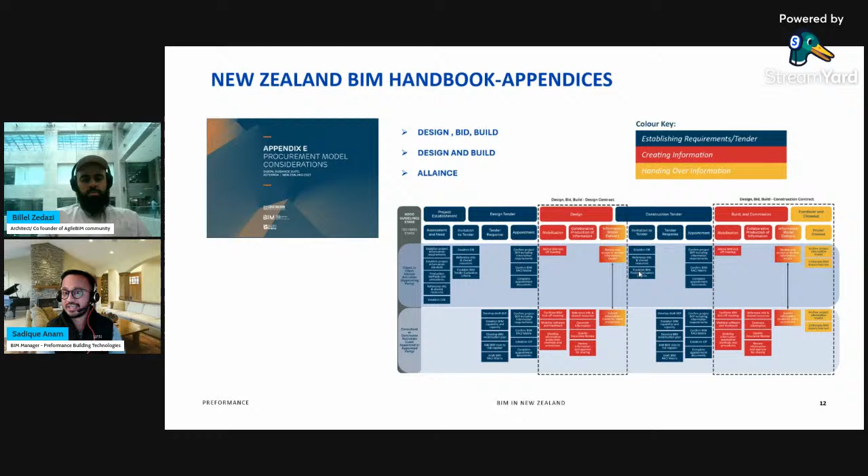Appendix D covers a lot of different things: asset management, record modeling, analysis, code validation. Appendix E talks about the procurement model. So Appendix E not just talks about the design phase, it talks about the BIM requirements from the contractor phase as well. So it's quite comprehensive, and I would really encourage everybody to read through it, and I'm pretty sure it would be quite beneficial.

Now, Appendix F talks about the RACI matrix. The RACI full form is responsible, accountable, consulted, and informed. So it outlines every single key accountable person and what they would be accountable for. Like in a design phase, the architect would be responsible for designing. The contractor, if it's engaged in the pre-construction phase, would be informed and consulted. So all different key players within the project would be assigned different responsibilities as per the RACI matrix. And this is quite comprehensive and quite useful as well. You'll see in a bit.

Appendix G talks about the level of development, but in more detail, and it talks about level of development for different kinds of elements within the building, outside the building, mechanical, electrical, civil, RCC, pre-stressed concrete, and everything. And Appendix H talks about BIM experience company-wide. It's a high-level understanding of how key people can be related within the project, BIM usage, client-specific requirements.

And Appendix G talks about, as you can see, we've highlighted on the right, what can be considered as a clash and what is not to be considered as a clash, what can be resolved on site as a contractor, and what needs to be resolved in the design phase by the consultants. So quite comprehensive, gives quite valuable insight on the whole coordination process, which I'll come to in a bit, but I would say really, really comprehensive.

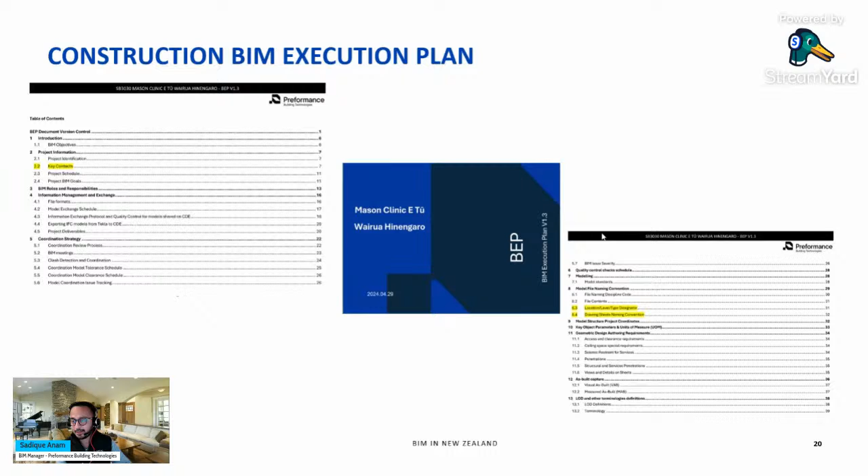So I've just taken a screenshot of some of the table of contents, like project information, BIM roles, quality checks, model structure. All of these things that are incorporated here are somehow related to the New Zealand BIM handbook, and that percolates to ISO 19650, BIM Forum LOD, or United Kingdom BIM standards. So quite comprehensive. And once we implement that, in a minute, I'll share the outcome of this BIM process, the result of implementing the New Zealand BIM handbook and all the standards available to us. So this is a construction BIM execution plan.

Some of the software that we use for common data environment are Procore for raising RFIs, sharing all the documents, sharing the models and drawings with our subcontractors, and the consultants sharing the models with us. Autodesk, as everyone knows, most of the modeling is done in Revit, so we're using Autodesk Revit, and we're using Autodesk Construction Cloud for our common data environment for model sharing and linking in Revit.

The other one being Dropbox. The Dropbox has all the contract documents, RFP documents, and everything on the contractual side of things. And also we share videos with our external clients, and we share, for example, snips of the progress of our document set using Dropbox. And SharePoint is where we host all our standards and BEPs and other documentation.

The next one is a very, very crucial tool for us in this project. It's called Revizto, and it's like an all-in-one platform that we use for our coordination and data validation, checking data, quantity estimates. For those who don't know what Revizto is, it's like a digital version of the huddle board that I think Ignacio talked about in the Norway BIM World Cup, but it's digital.

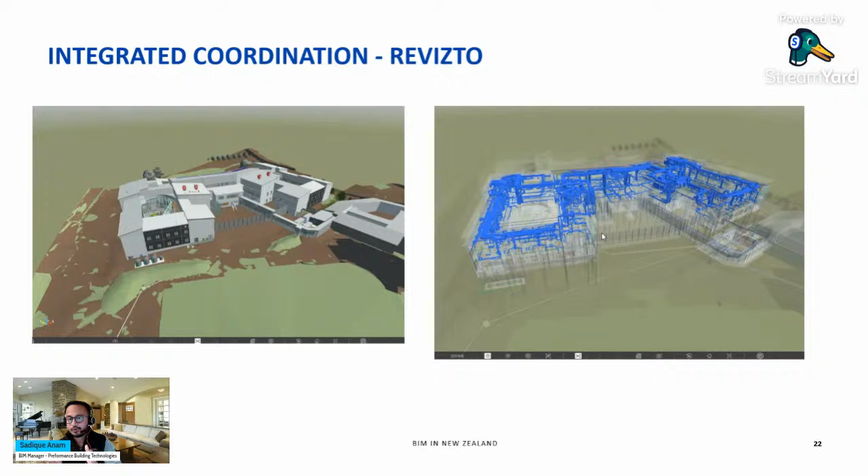That means the model is isolated, but it's showing you with reference to the building. Whereas if I isolate it like we do in Navisworks, you can't really refer to where it is located. But in this case, in Revizto, it's really powerful. It shows you everything in transparency.

The other thing is that we talked about the BIM modeling. Now, what can we do if we have a very good BIM model? We can use Revizto to do the quantity estimates. Imagine the quantity surveyors doing quantity takeoffs out of the drawings. Now, if your model is quite comprehensive, we can do these quantity takeoffs within minutes from the model.

So this is the quantity takeoff of all the flexible ducts and mechanical equipment from the model, and it took 3.5 minutes because our information within the model was so comprehensive that we could do all this quantity takeoff within minutes. And it is a tool that is being used by our quantity surveyors extensively to validate the quantity takeoffs from the drawings and match it with the model.

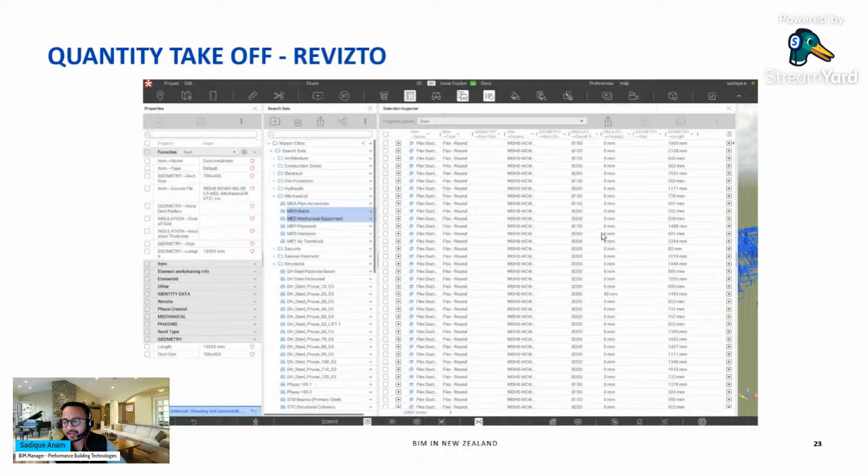So the more comprehensive your standards are, the more comprehensive your data would be. The more comprehensive your data are, the more comprehensive your quantity takeoff would be. And this is really crucial from the perspective of a contractor, because a little difference can cost us millions of dollars. And yeah, I was talking about the difference costing us millions of dollars. This is a great example.

So initially we priced this project out of 100% developed design drawings, and when we got the 100% detailed design drawings, we realized that the steel quantity increased by 75.87 tons. But our subcontractor said that the quantity increased by 180 tons. So we did a sanity check. We brought in the subcontractor's model and the 100% developed design model, and we overlaid it.

And as you can see, those yellow models are the subcontractor's model, the steel designer's model, and the green one is the design model. So we could see that there's a lot of extra yellow elements in there. That means a lot of extra things have been added. So as a contractor, if we don't do our due diligence, our subcontractor can say we have 180 tons of extra steel in there.

However, this workflow was developed by me and my manager to quantify the quantity of steel within the model at different design phases. And we found out that actually it was not 180 tons, but 75.87, give or take 76 tons of extra steel that were added from what we priced. So this could significantly impact our margins as a contractor, and with Revizto we are able to quantify that variation.

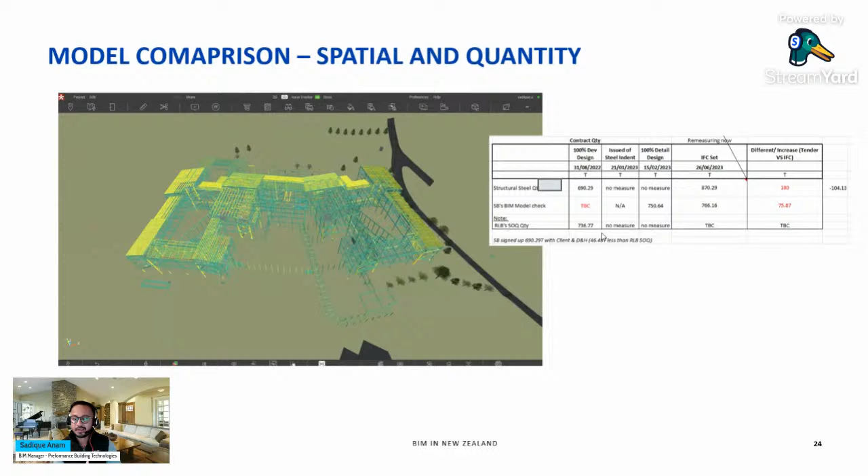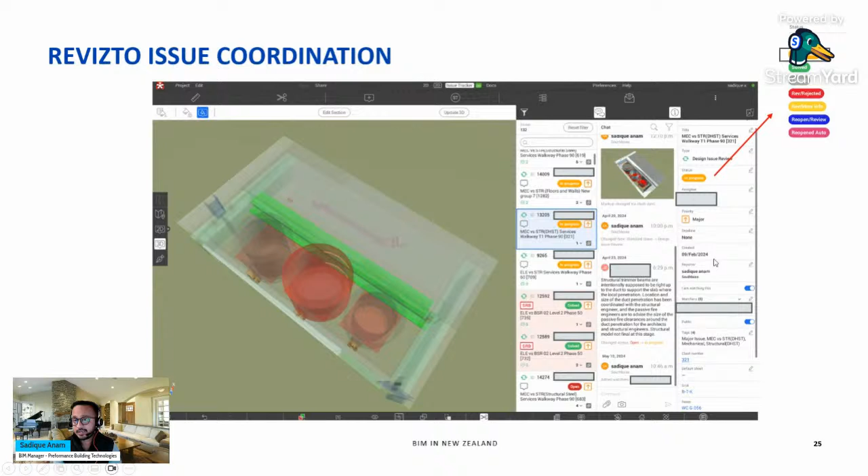So when an issue is created by running clash automation, we can assign that issue to the right person. We can put a priority. We can put a date when it was created. It's automatic, and we can put an end date by which they need to respond to us.

And we can put different people as watchers. So we're not the only person watching. Any other people from the other disciplines that it's clashing with, they would be watchers as well. So it's a great platform to collaborate and hold people accountable.

So in this case, the mechanical engineer has put a comment here, and every comment and every screenshot, a copy of that remains in the chat. So we have got clear evidence that if something is not resolved, as you can see it is in progress, we can hold the designers or any other person accountable that, well, actually you have not resolved the issue within the time frame, and this could potentially lead to a design change which would delay the project further.

So this is a great tool, but as you know, Revizto is just a tool. All of these workflows are developed in-house, like all of the statuses that you can see, which I'll discuss in a minute. We developed that workflow so that we can deal with the consultants at the same time we deal with our subcontractors. And you'll understand that in a bit.

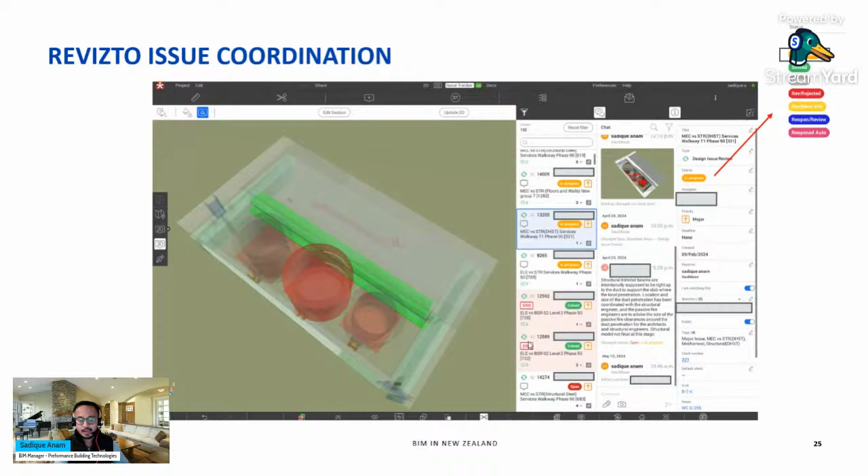The next is the reviewed and rejected status that I created. So basically when a consultant gives us a specification, in this case we've got a steel beam passing through a firewall, and we don't know what specifications we need to build a penetration. This is an in-house workflow developed at Performance Building Technologies. So we would raise this as an issue with the architect.

The architect gives us a specification, and we assign that specification to our subcontractor, and the subcontractor puts a comment: well, actually, what the architect has advised, you cannot build it on site. So as a contractor, it's not just our duty to look at things from a design perspective, we also look at things from a buildability perspective. A thing can be 100% correctly designed, but it may not be buildable.

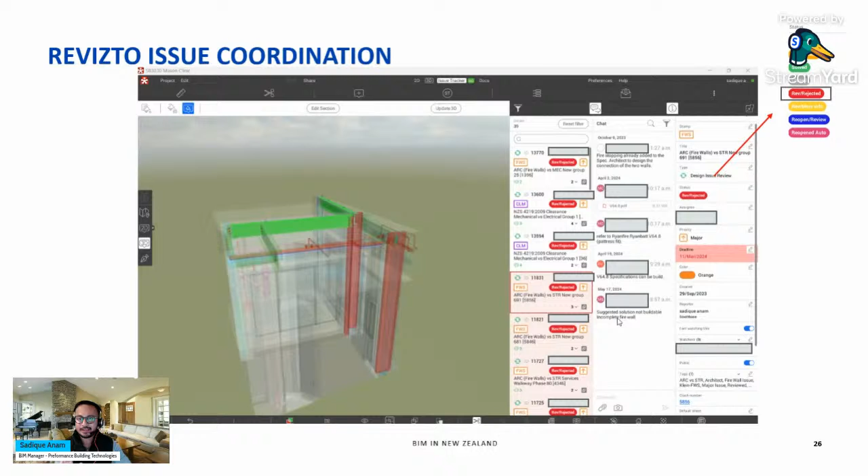So this workflow of how we engage consultants on one hand and subcontractors on the other hand was standardized by me at Performance, and it has been working like magic for us. And this is one of my favorites, which is reviewed, more information required. As you can see, we have got quite a few ducts that are passing through the structural floor, and we've got a PFC here where the duct is clashing, and the seismic designer said adjust on site.

So I've changed the status from solved to review, more information needed, because this might trigger a lot of design change for the structural engineer because we don't have enough space here. So if we need to prevent this clash, we need to move all of these ducts 100 millimeters to the left. That means the structural design of the slab would change. And that's why this status is created, so that we can ask them, look, we need more information on that.

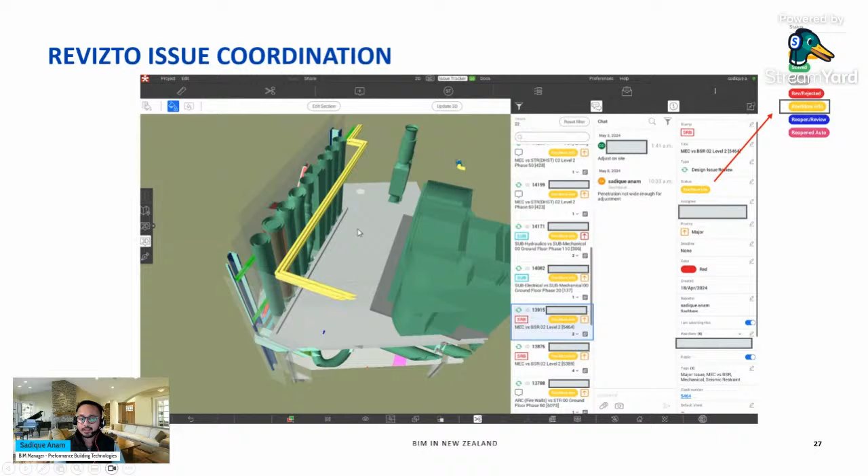We need the penetration details, the trimmer beam details around this area, because the size of the penetration is going to change. The structural design, of course, is going to change as well. And the other one, I would say, is also critical. So if this is a beam that is flush against a firewall, as per New Zealand standards, you need to fire rate these beams with GIB lining. But as you can see, the GIB lining is not modeled.

So as per our subcontractors, such GIB lining costs us $100 per meter, labor plus material. So imagine we have got 220 meters of this GIB lining, which was never modeled, and that cost would have been coming out of our own margins. But because of using these tools in the most efficient way we can, we were actually able to quantify the amount of GIB lining that was not modeled, and hence was not priced, and this actually triggered a variation.

So we found out all these issues in the design phase, and we have just 14 days to do that after the issue for construction model is submitted, and within those 14 days we found a significant number of issues which, as a contractor, could have cost us at least several hundred thousand.

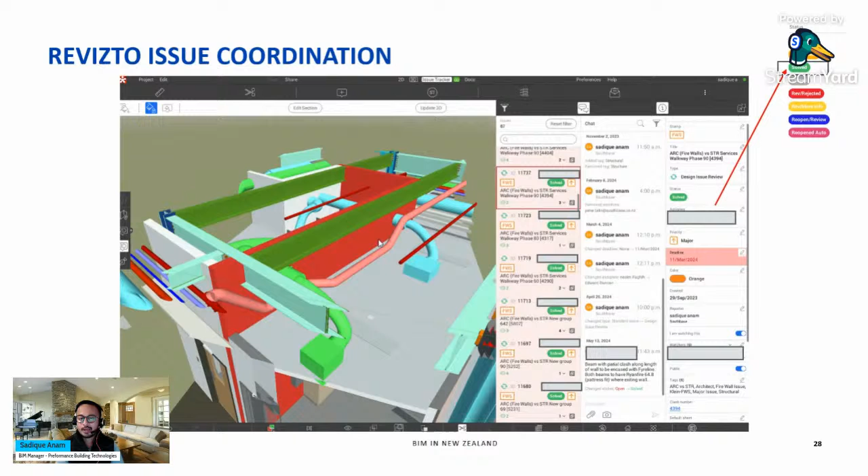So this is some of the coordination we use it for, and one of the great utilities of the tool is augmented reality. So Revizto has got augmented reality as well. All you need is a phone with LiDAR, typically an iPhone or an iPad, and you can actually calibrate the model on site. And this is how I'm verifying if the stairs are in place.

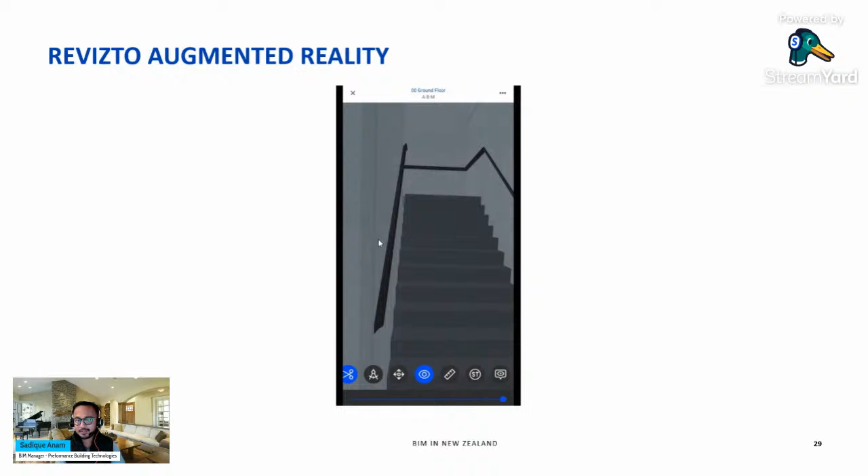And it's not something that only I can use. Anybody on site, even the laborers, anyone who has got access to the project and has got an iPhone. So if the client comes on site and they want to go through the building and see how it feels once it's constructed, they can actually calibrate it. I can calibrate it for them on site, and they can walk through the model.

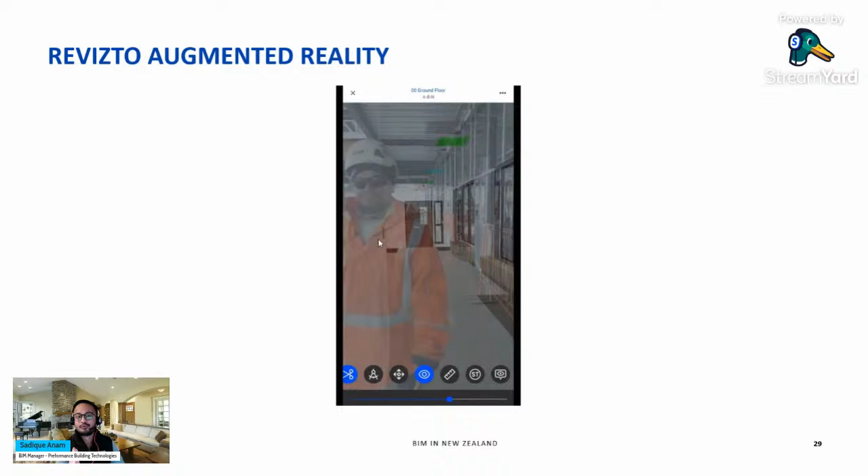As you can see, I'm walking through the model. The building is not even complete, and we can actually have a feel for how it looks. And this exercise was done by me in collaboration with Revizto, and Michael Richards from Revizto helped us with this one. But it's a fairly easy and straightforward process. Once you calibrate it, you can walk through the model and actually see how the building would feel

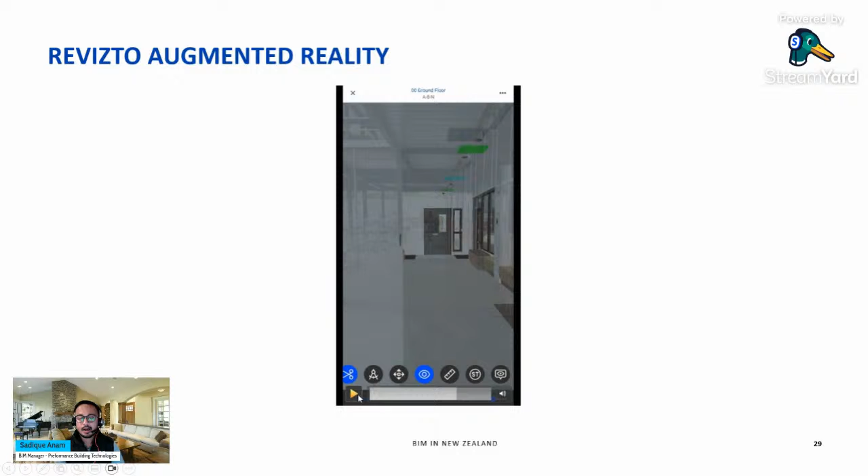when it's constructed. And you can even find out, in this case, those access panels in there, you can actually see those access panels need to be coordinated from the reflected ceiling plans. If we walk through the model and find out that it's not in the right place, we can ask the architect to give us the right reflected ceiling plans. And that's what happened in this project.

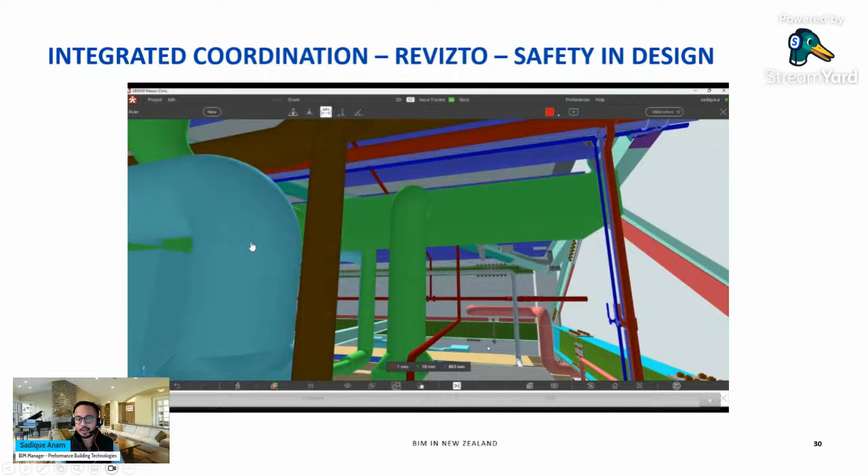And the other one we use Revizto for is safety in design. Like I said, a design may be perfectly buildable, but it may not be safe, or a design may be perfectly meeting all the design standards, but may not be buildable. So in this exercise, I walked with the project manager and construction manager through the building to find out some of the health and safety hazards. New Zealand is very strict with health and safety requirements.

So in a second, you would see that the duct in front of you is actually on the walkway, and anyone who walks through has got very little space to access the end of the building. So that's a safety in design issue as per New Zealand standards. So we had to highlight this to the designers and the architect.

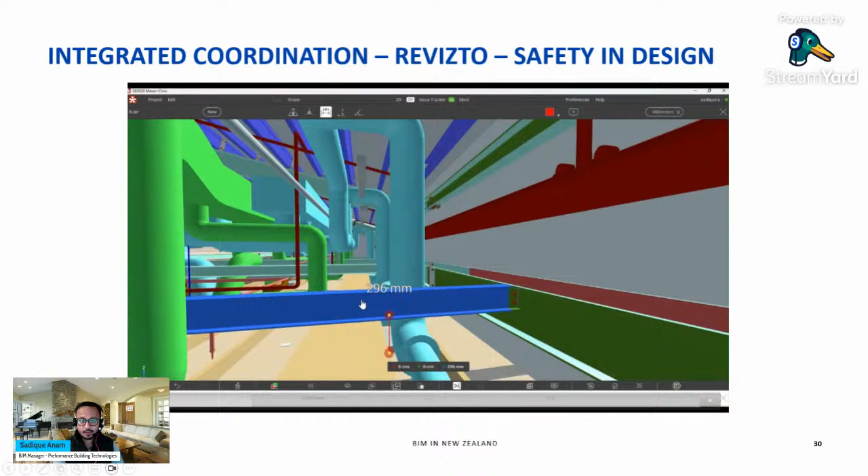As you can see, a person has to jump over this beam that is about 30 or 40 centimeters tall. We can do instant measurements as well. So to the top of the beam, it's about 30 centimeters tall. So it could be a potential safety hazard, and it could actually impact the people who would be maintaining these facilities. So quite a useful tool to do the safety in design.

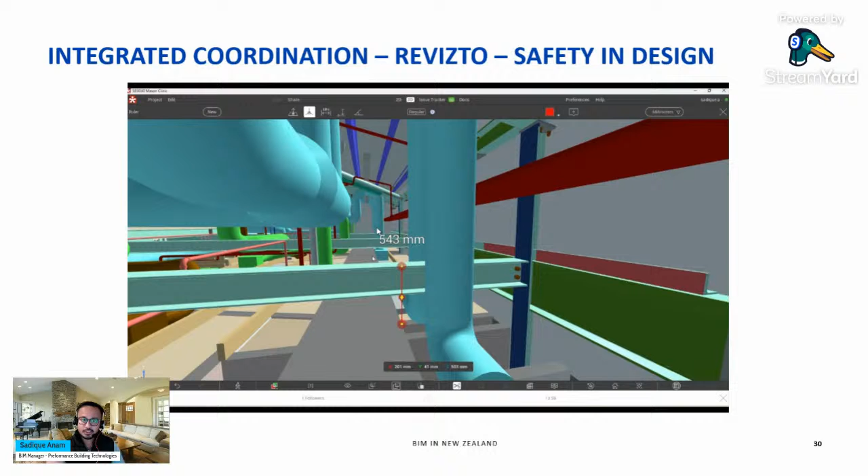And all this is possible because we have really comprehensive data within our models. So as you can see, half a meter, 543 millimeters above the surface of the walkway. That means any person who is maintaining these assets needs to jump over these structural elements, which is not ideal, and might not even qualify under health and safety standards.

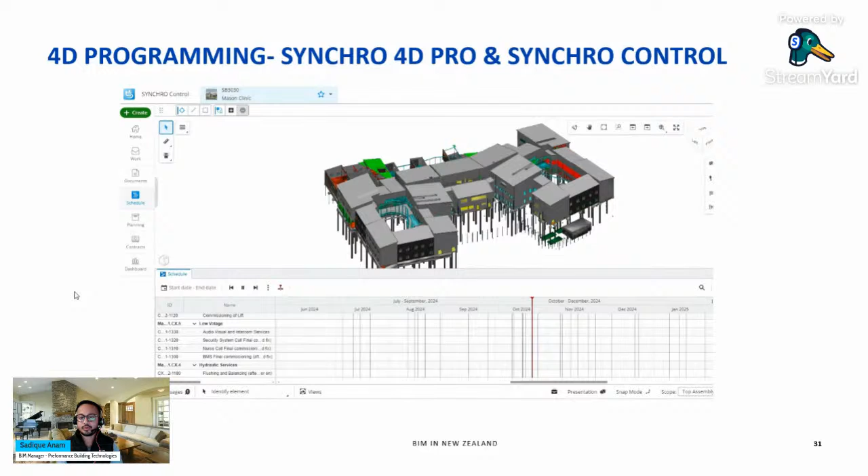So this was the exercise, and the other exercise that we do is 4D sequencing. As you can see, I did 4D modeling based on different revisions of the program. We go on site and talk with the senior programmer. We sit down every week with the programmer and the main subcontractors, discuss what's going on and what's not going on, and put progress on the different activities within the program. We sequence different activities on the critical path.

So we do a lot of moving things around because we have got comprehensive data, like I said, and we can sequence things in a more appropriate way, and we can look at different scenarios to see what things need to be picked up later on, or which part of the project we need to do next to stick with the main program and not have any delays.

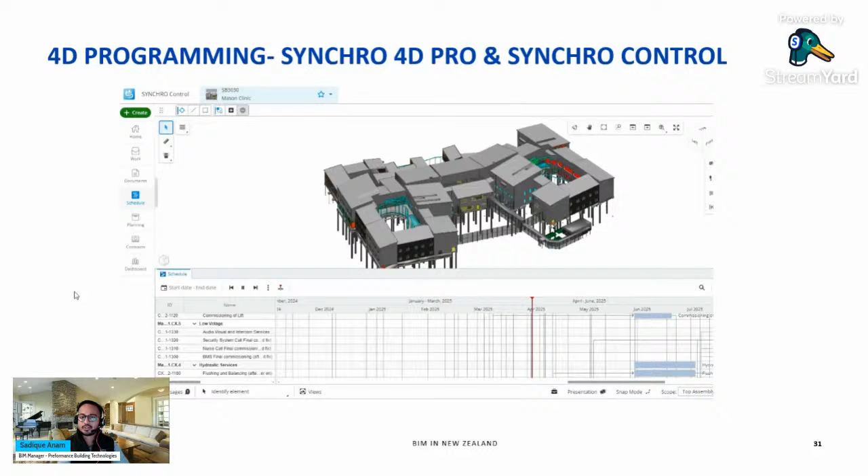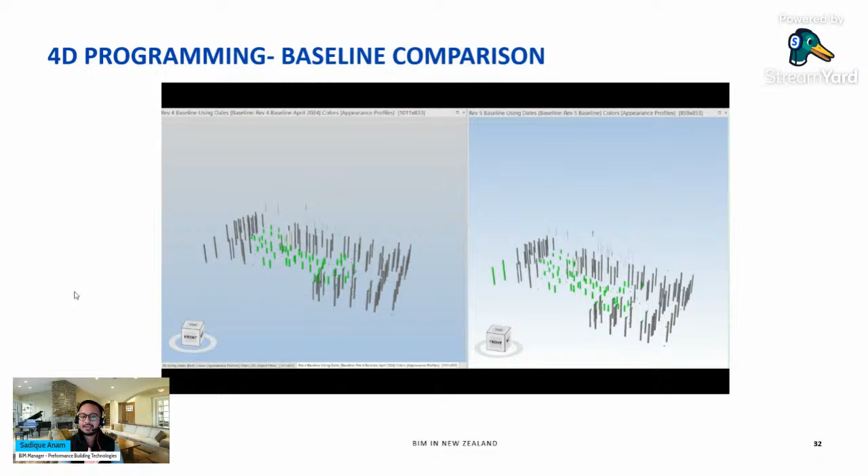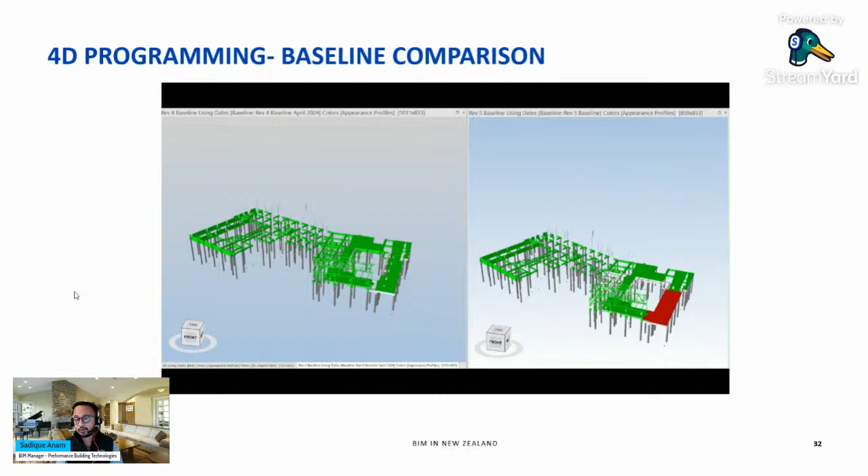So the other thing that we do is not just 4D programming, we do a baseline comparison. The baseline for revision 4 on the left was what was initially programmed. Revision 5 came back a few months later. We had a few delays on the project because of various factors. As you will see, we could visualize those delays and can actually sequence the different activities following today.

And so this is based up to 1st of July. So we can sequence the activities from 23rd of May up to 1st of July, so that we can match our activity here with revision 4.

For example, one of the outcomes of this report was that we put more resources on the people who are putting the brickwork in there, so that we can get the brickwork done in half the time, and we can match the sequencing that was initially agreed on. It's quite a useful tool, so we know where we are lagging in the project.

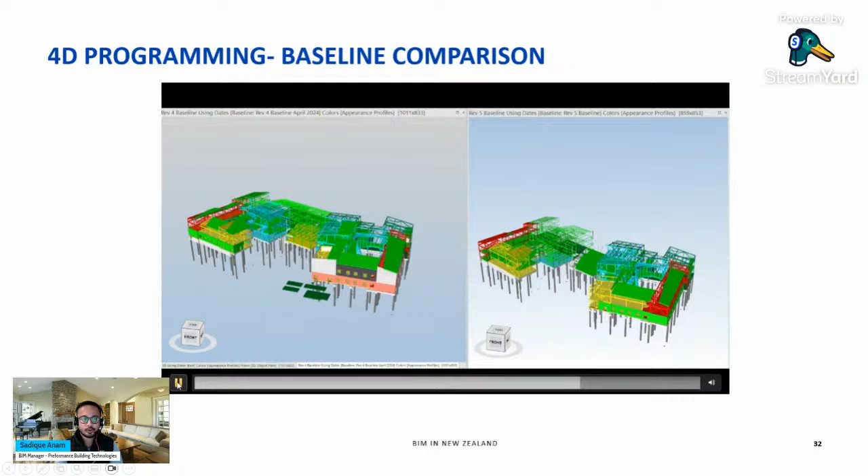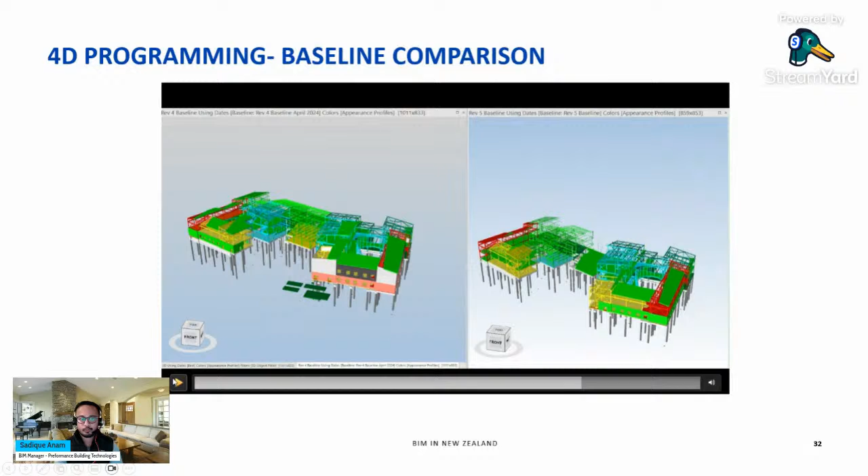As you can see here, at any point in time, 3 months ago we should have been here as of today, but 3 months later we are a bit behind. So we're going to put more resources and people to build this part of the building, to build the facade, and also to build this part of the structure here. 4D sequencing is just amazing.

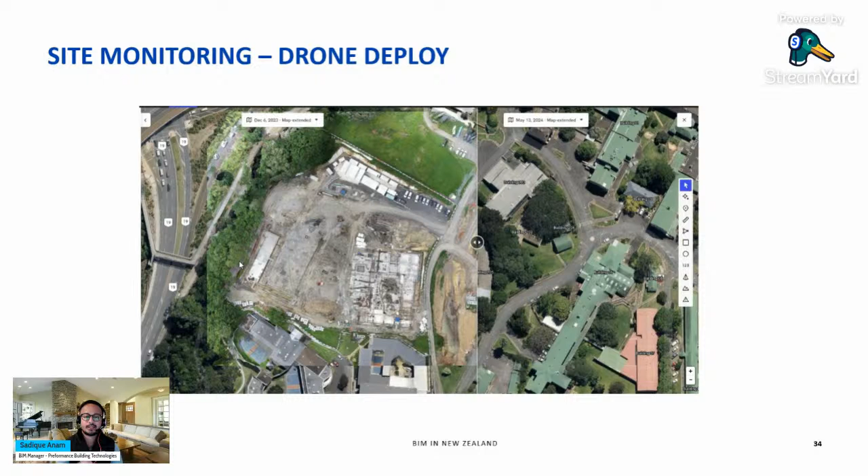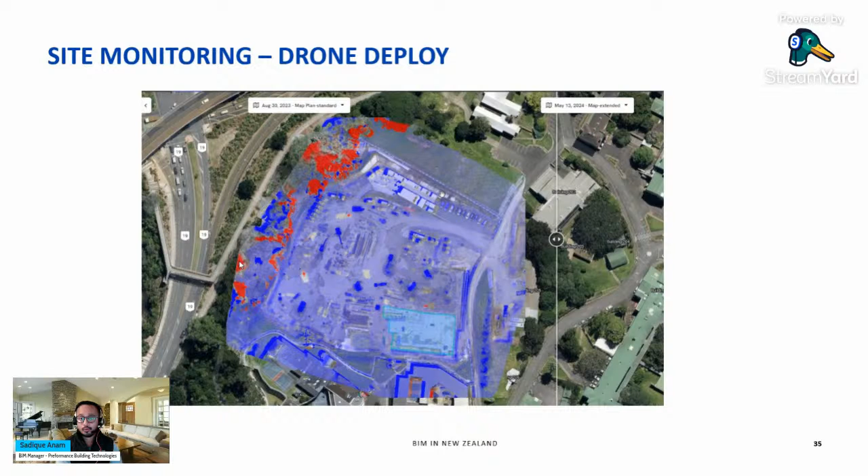So we fly a drone at a specific time every single day to capture the site, and from that we can compare different things. Another really important use of this tool is that we can find out the total cut and fill on site. These photos aren't just photos, it's photogrammetry - the drone also captures elevation from the photos, and we can calculate the cut and fill and the amount of work done based on different days. So August 30, 2023 versus May 13, 2024 on the right screen. Exceptional tool.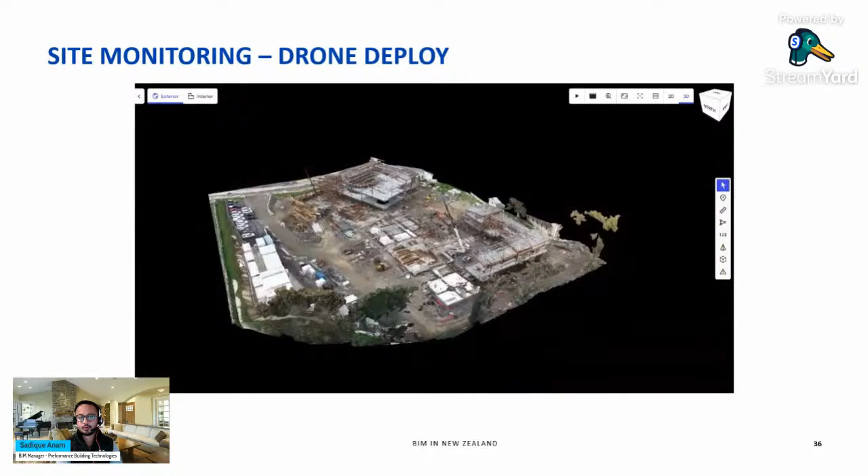The other one is generating a point cloud. This point cloud is generated without needing a lidar camera. From the photogrammetric image, on the back end it gets processed and we get a point cloud model. And the other tool is reality capture.

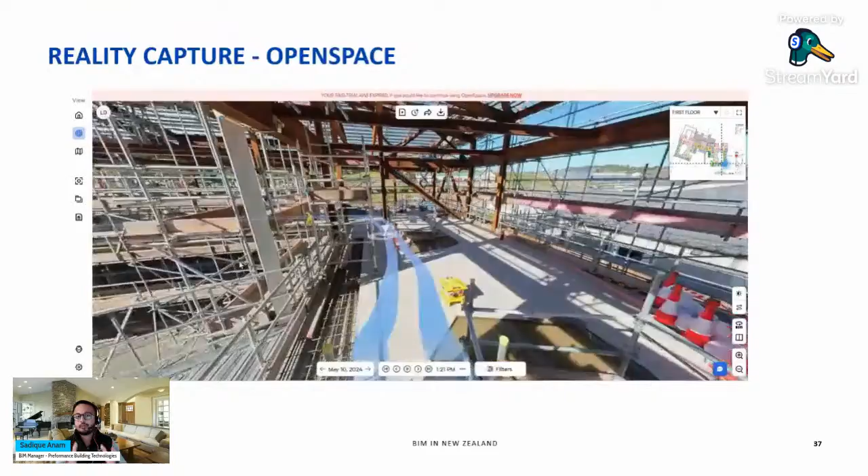So we've got the design, we build on site, we fix issues on the design, but there may be certain issues that get overlooked, and we might actually find those out while going on site. OpenSpace is a great tool for visual as-builts. It's an as-built platform and reality capture platform where we do site captures every single day. Our subcontractors would do it when they go in there and install their mechanical equipment. And if we find anything, we create a note here.

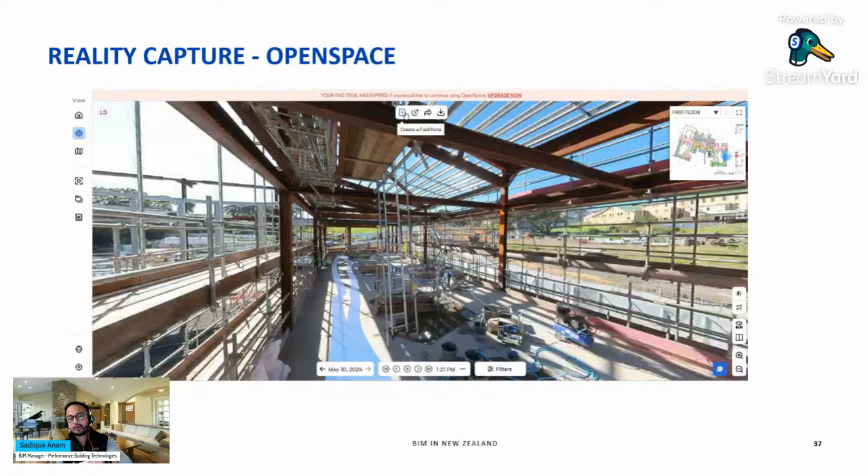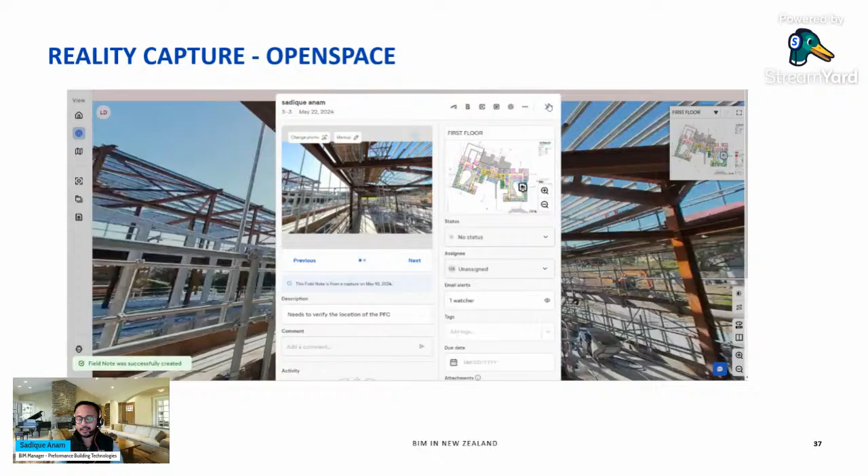These notes or issues are geospatially located, so you can import it into the Revit model and tell the consultant, 'actually, we overlooked this during the design phase.' When we went on site and built it, we find - say for example, in this case I've put a random description here - needs to be verified, the location, and we can export this in Revit, and they can locate exactly where this issue is located, go through their documentation, and let us know the solution. That way we can find issues on site and backtrack it to the design phase or the shop drawing phase.

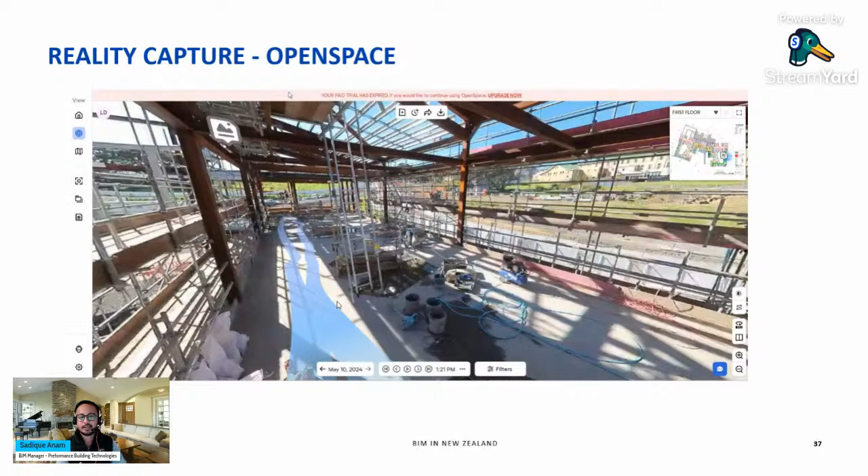Quite a handy tool, really useful, and we've got the total progress of the site captured and hosted in the cloud, which can be accessed by our client, external stakeholders, internal stakeholders, and the project management team. Anyone can access this information.

Now, what was the outcome of having a good BIM model in this project? We had great health and safety because we do safety in design analysis, and we make various claims, like I showed with Drone Deploy. We had uneven site conditions which were not accounted for in the geotechnical design, and we had to do a lot of excavation. We made several million dollars of claims, and we were able to quantify it with drone captures and calculating the total amount of excavation done on a week-to-week basis, and those were used as evidence to claim any variation. The other one is assistance with buildability and methodology.

Clash is one thing, buildability is another thing, and as a contractor we look at things from the buildability perspective. The other one is improved construction sequencing. Sequencing is really crucial - it helps us analyze the amount of resources and helps us streamline those resources into the project, quantify them, and make plans for them.